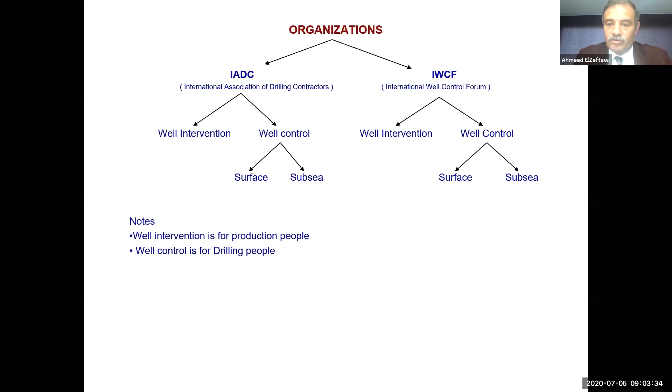So there are 2 organizations actually worldwide issue this certificate. One based in the United States of America, which is the International Association of Drilling Contractors. The other one is based in England, which is IWCF, stands for International Well Control Forum. But as I said, this is not a course of IWCF or IADC, as this will be through the university, and I believe you will get a certificate at the end of the course.

We split this course into 4 sessions. The first session will be today, which is today. It will be about well control. We'll have another session of completion. A 3rd session will be wireline. The 4th session will be coil tubing.

First of all, I need to share a secret with you. In all my years of experience, which is from 95, teaching in almost 18 to 20 countries around the globe, I always talk to people. This is the first time to talk to the wall. I used to talk to the wall when I fight with my wife, but that lasts for a few seconds. But talking for 1 hour to the wall, I mean to the computer, this is a unique experience for me. Hope I can manage.

This course, actually, the topics we will talk about is well control, risk assessment. We will talk quickly about what's pressure and what's volume. And we'll have a separate course, as I said, for completion, another one for coil tubing, and another one for wireline. Today we will discuss only well control.

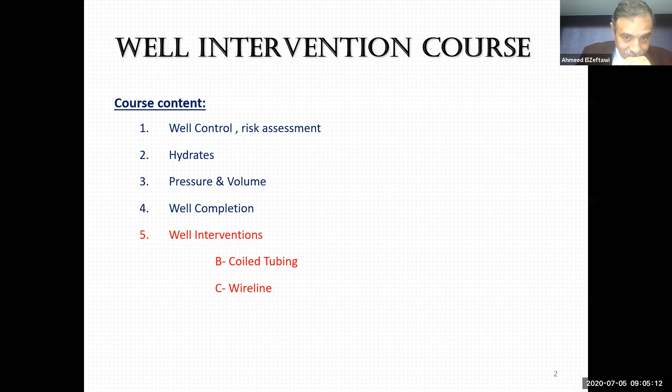Let's start from the beginning. To do any job, even not talking about oil field - if you have a problem in your car, to fix your car correctly, you have to go to a good mechanic. Then this mechanic has to have the right tools to fix your car, and he has to have a plan how to fix it. The same thing if you have some plumbing work at your villa: good plumber, good equipment, he has to have plans and procedures.

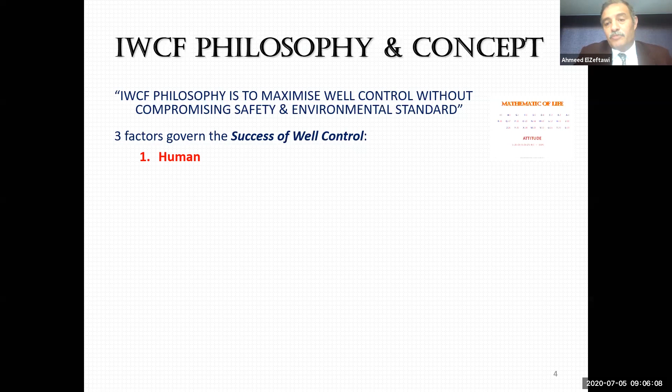The same thing applies to the oil field industry. And we said that 3 factors govern the success of any well control: human, equipment, plans and procedures. And from here, we have to fight.

I like fighting a lot, and this is one of the problems I'm facing now, that I cannot fight with you because I punch you, you cannot respond. Many people say, Ahmed, what you are writing is wrong. This could be right 50 years ago. But right now, equipment should come number 1. Human do mistakes. Human doesn't obey orders. But equipment, they don't do mistakes. Everything is computerized now. So you should write equipment number 1 and then put human number 2. And I said, well, who invented equipment? It's you and me.

Always human comes number 1. I gave an example: a good operator can run junk equipment, but not vice versa. If you have brand new equipment and a stupid operator, he will not be able to run it. And if he runs it, he will destroy it.

So human comes before equipment. That's why when we hire a gentleman or a lady to join the oil field industry, we have to check that he is the right person, going through a sequence of questions to be sure we select the right person.

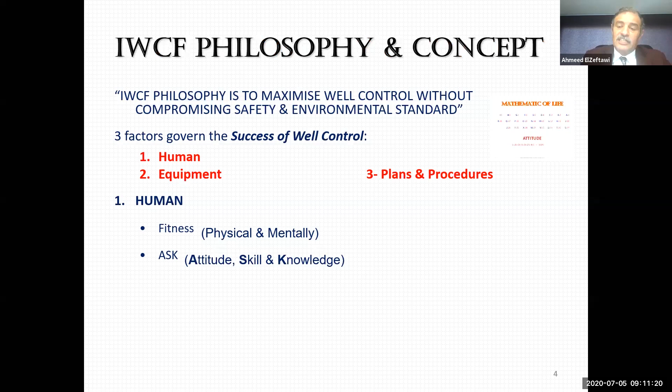One day I was working as an operation manager and I hired a supervisor. He was excellent in English. He is an engineer and he worked 12 years, he has 12 years experience. And he was working 1 month off, 1 month on.

After the 1 month, I asked him to come to my office, and I said, thank you, don't come back. What was the problem?

He used to go to the mess to have breakfast when they were in the field. If he found his helper sitting in his preferred chair, he would go to the helper and ask him to move, take his breakfast, and eat somewhere else, because this was the chair he liked to sit in. I fired him because of that.

This is a very bad attitude. He will destroy my team. So I said, thank you, don't come back. Attitude is very important.

Skills. We need people with the skills. Skills is very important as well. I always say people are 2 types: rock type and sponge type.

The sponge type people, if you put the sponge in a bucket of water, the sponge will absorb the water quickly. Go to the rock, put it in the bucket of water, come after a week, it is still a rock. It will change, yes, but this will take a year.

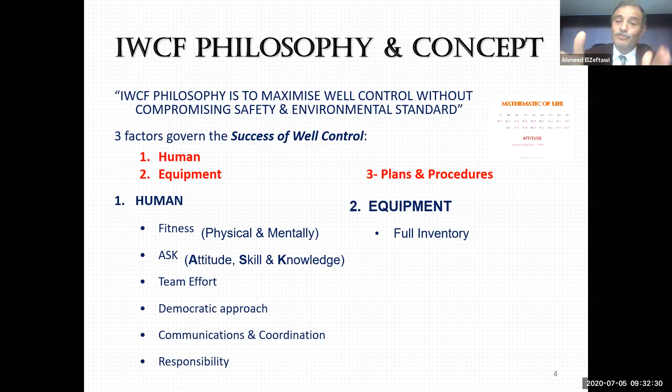We said human number one, equipment number two. People who work with the equipment should have a full inventory, here before it is in the book. We cannot say I am a company man doing a critical job and not know what equipment is available.

Then I go to the wireline supervisor and say we're going to run a gauge cutter in the field. If his answer is 'okay, let me check my toolbox if I have it or not,' you know what I should do? I should make a hole and bury him in the soil, because he should know exactly what he has. In well intervention, if I need this tool, I need it now. Now means now.

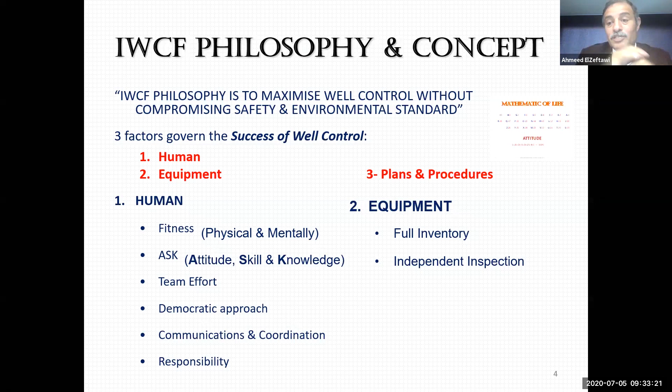Let me give you a life example. One day I was working in Abu Dhabi at the beginning of my career. It was a rigless operation, meaning there is no rig on location, so the service company comes to the desert and rigs up their equipment directly on the Christmas tree. The service company came, put the equipment on the ground, and before they rig up on the Christmas tree, the company representative has to come check the equipment before giving the signal to start the job.

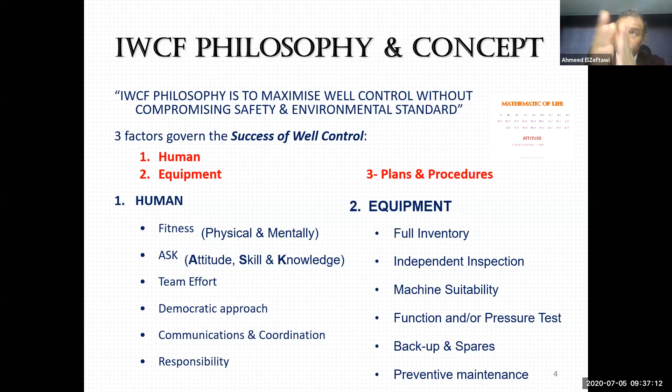We have to make pressure tests, have spares and backups, and have preventive maintenance. If I'm a company man and you're a service company bringing your equipment, before I allow you to enter my site I say 'bring me your file.' And if I look at the file and find that the last maintenance was done 6 months ago, you know what I'll do? Take your book, you see this door - go out and close the door. I don't want to see you again.

So, plans and procedures - we have to have plans for how to do the job and what the backup is if things go wrong. Say we decide to run coil tubing in the hole to 10,000 feet at 10,000 PSI, and then start mixing acid, run in the hole and pump acid. What if we run in the hole but get stuck at 5,000 feet? What about the acid we already mixed? How are we going to deal with it? So you have to have a backup plan.

Let's talk about barrier. Do you know what's barrier? People start telling me what's barrier, whatever in Arabic says that. I said, well, I can go to the dictionary and discover this. What does this mean? What's the meaning of the word?

Actually, if we ask ourselves what kind of well service disaster could happen caused by pressure, this is the word that we are all here for. If there is no pressure, we have no problem in the oil field. If any problem in the oil field, if you look at the root of the problem, you will find pressure somehow.

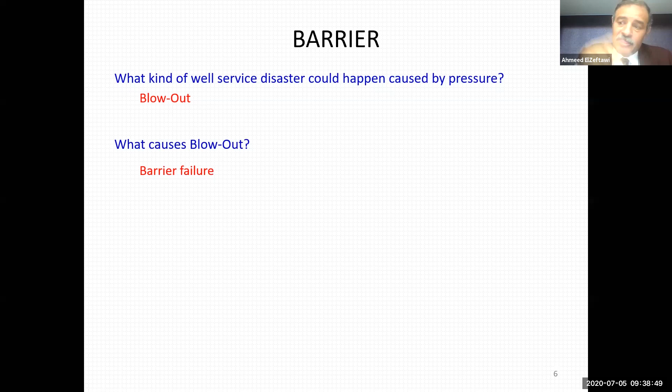Pressure will cause what we call blowout. What causes blowout? The barrier you select failed to do his job. What is the barrier? The definition of a barrier: it is any device, fluid or substance that prevents the flow of hydrocarbon.

Like Christmas tree - if the Christmas tree is closed, this will prevent. Like blowout preventer, BOPs, stuffing boxes, strip rubber and coil tubing and wireline. Wireline plug, the plugs that we are running in the hole to set it in the tubing to prevent. Some people say downhole safety valve. The downhole safety valve is a device that we run and set in the production tubing that when we close it, it will prevent. So according to this definition, any device or substance that prevents the well flow is a barrier.

But in well intervention, we don't consider it a barrier. We consider it an emergency barrier. What's the difference between a barrier and an emergency barrier? It's like this example I'm giving you.

This is my wallet. If I have 200 pounds in my wallet, which I put in my jacket now, and I have 300 pounds in my pocket - let us talk about dollars since you might not know what a pound is. So I have $200 in my wallet and $300 in my pocket. If you ask me how many dollars I have, I'd say 300. Come on Ahmeed, you have another 200 in your wallet. I said no, I don't see them. I live my life with the $300 in my pocket. This $200 in my wallet, I will show it to you when you put the knife on my neck - I will give you my wallet, my trouser, my shoes, everything.

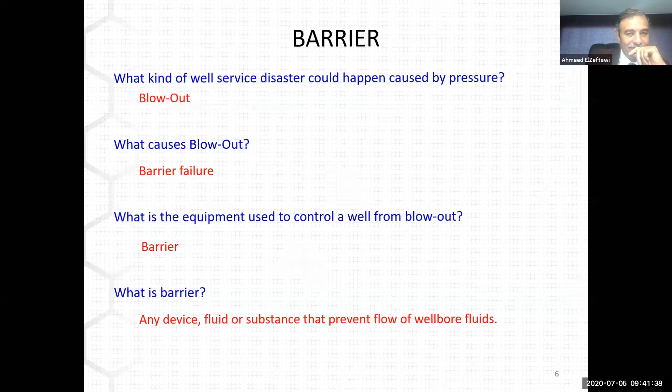We classify a barrier into 3 categories: primary barrier, secondary barrier, tertiary barrier. So normally, when we run in the hole using whatever device, wireline or coiled tubing, we always use our primary barrier, which is normally a rubber item that seals around the tubing or wireline. So we are running in the hole, and this rubber element that seals around this wire or pipe prevents well fluid or well pressure coming out. This is normally our primary barrier.

If during the job this primary barrier failed, what we have to do is first stop operation and use our secondary barrier. Why do we have to stop operation? Because the only barrier that can work while running in the hole or pulling out of the hole is the primary barrier. Any other barrier you are going to use is designed to work in a static condition. That's why you have to stop operation first and then apply the secondary barrier.

Normally the secondary barrier is also a rubber device, the BOP, blowout preventer, that when we close it, it seals around the wire or pipe. If you apply your secondary barrier and it fails to prevent the pressure coming out of the well - meaning your primary barrier failed and your secondary barrier failed - then you have to use your tertiary barrier. Normally your tertiary barrier is a shearing barrier, a barrier that shears - it cuts to be able to seal.

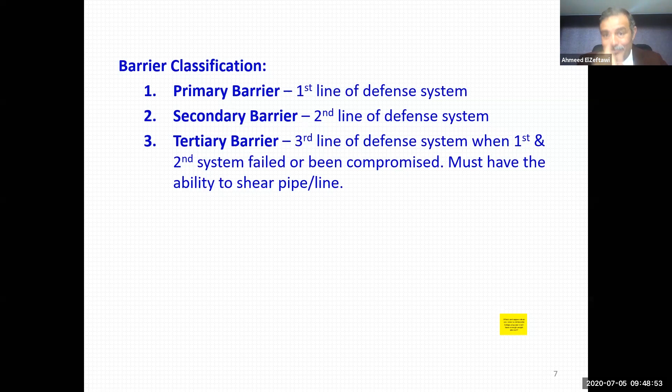This is a nice example of what can happen when you unset a retrievable bridge plug and don't have enough weight above it. The retrievable bridge plug is run with slick line or wire line through the production tubing, then passes into the open hole, to the casing. It has a rubber element that inflates to sit against the casing, not the tubing, to do a certain job. Once we finish the job, we run back to retrieve it.

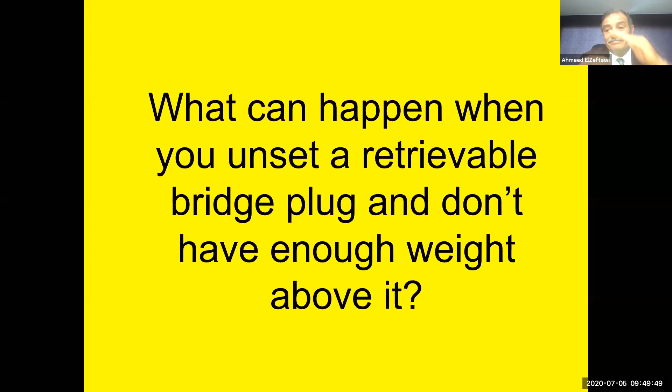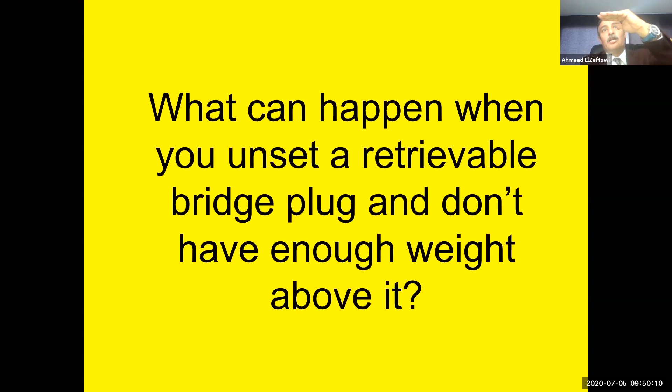Before you retrieve this bridge plug, what's the first thing you should do? You have to equalize the pressure. Because below the valve here is pressure, above it there is no pressure. This differential pressure, if you try to retrieve it, the moment you do, it comes out of its place. This pressure will push the valve to the sky. This is the picture you see. This is what we call a blowout.

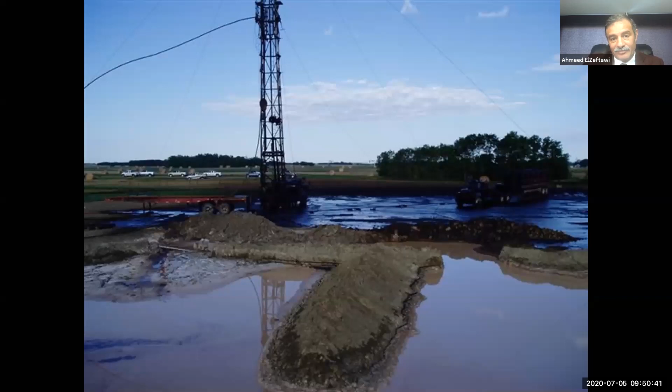You see this disaster? This is one of the questions you might have in the quiz: what is the impact of the blowout? If we put it in categories: number one, life loss, people will die. Number two, what you see, environmental loss. Number three, financial loss, you destroyed the field, the reservoir. Number four, reputation, your reputation will be affected definitely.

Number five, extra governmental regulation.

It's exactly like in the old days, when I travel I go to the airport maybe 2 hours before flight departure, then we pass by 1 or 2 checkpoints quickly. Nowadays it's completely different, they check me out. I have to go 4 hours before departure, and they start checking me out before I even enter the airport. I believe the next step, before you go out of your home, you'll find a checkpoint. Then you take your clothes off, they check you, then you go out, wear your clothes, walk 2 steps, would you please take your clothes off? Well, I just did here. Oh, would you please do it again? This bottle of water, I cannot take it with me to the airplane now.

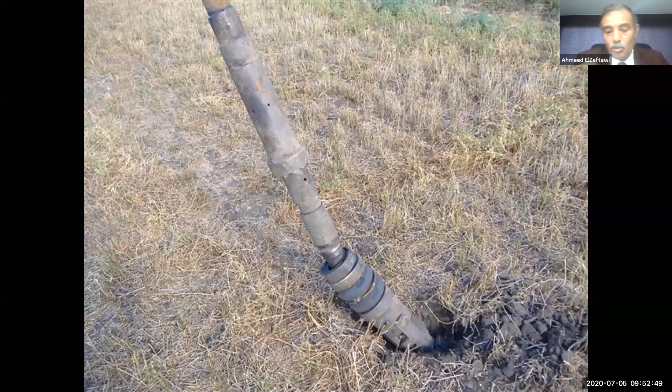This is the tubing that came out of the well, and this is the retrievable bridge plug. They found it here at the rig site. If you have a measuring tape to measure the distance between the rig site and where this bridge plug was found, it's 400 meters, almost half a kilometer. This was not there before, this was 1,000 feet below the ground. This is what pressure makes.

So you have to equalize. That's why to open a valve, you have to equalize the pressure. We have special types of valves that can open and close under pressure, but the majority of valves require you to equalize the pressure first.

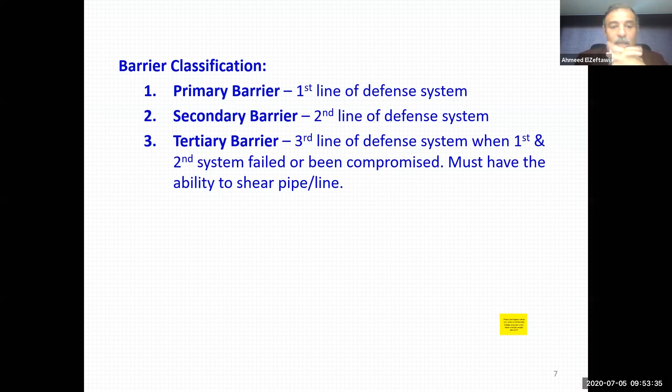What does the API say? The API recommendation is a minimum of 2 tested and available barriers, regardless of the type of operation. So at any particular job you are doing, the minimum number of barriers you have to have is 2. When we deal with well intervention, meaning coil tubing, wireline, or snubbing, because these 3 services are done under pressure, the minimum number of tested and available barriers is 2. That's why we always use 3, because during the job, if one fails, we're still covered by the API, we have 2 until we fix the 3rd, or we pull out of the hole to rearrange our barriers. So the minimum number, keep in mind, regardless of drilling, workover, or well intervention, is 2, regardless of pressure, even if the pressure is 0.

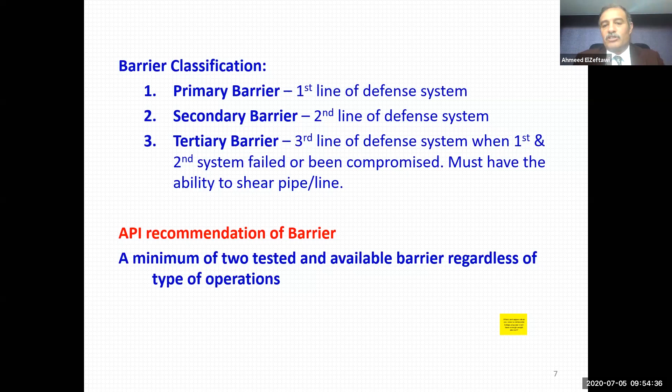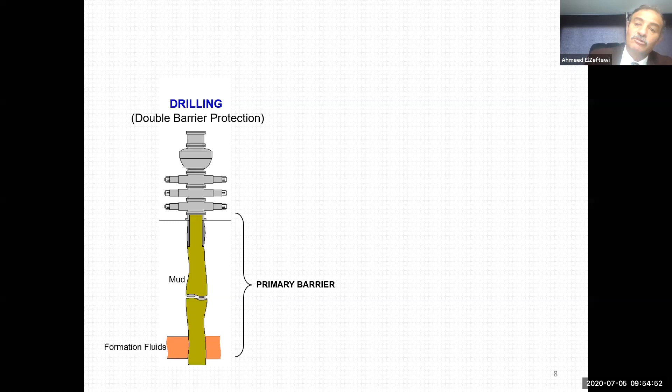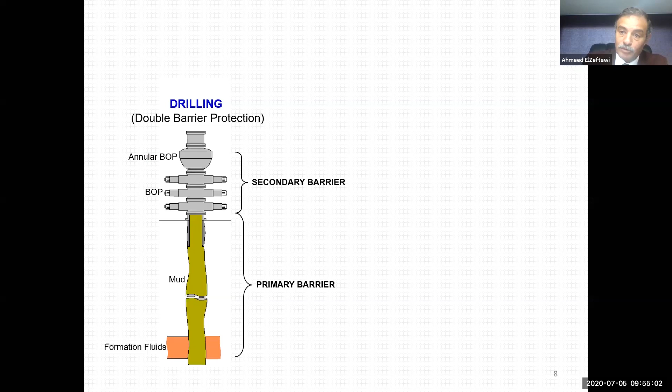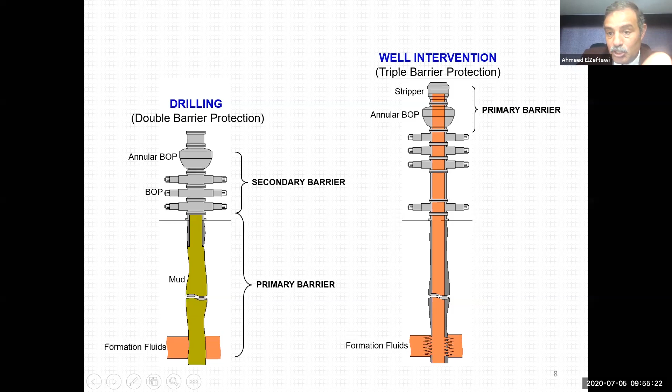In drilling, the 2 barriers we use are the BOP and the fluid, which is the mud. The mud is always our primary barrier because it's the first thing that faces the pressure downhole. If it fails, our secondary barrier works, which is the BOP, blowout preventer. In well intervention, it's the opposite, we count the barriers from top down. Our primary barrier is the rubber element, the stripper. Our secondary barrier is the BOP. Our tertiary barrier is the shear seal BOP. If the shear seal BOP fails, then our barrier is the Christmas tree.

There are two types of barriers we have: mechanical barrier and hydrostatic barrier. In mechanical barrier, we have two types: closed type and closable type.

What's the difference between the two? A closed type is closed throughout the operation. As we discussed, running in the hole, we have a rubber element, whether it's stripper or stuffing box or slick line or coiled tubing. During running in the hole, this rubber element is always closed on the metal while running in or pulling out of the hole. That's why this is closed type.

But the closable type is like the BOP. It's closed when required, meaning it's open by default. We close it when it is essential, like a blowout preventer. The blowout preventer, while running in or pulling out of the hole, is always in open position. When you close it, if your primary barrier failed, you stop the operation and close your secondary barrier, which is the BOP. That's why it is a closable barrier, not closed.

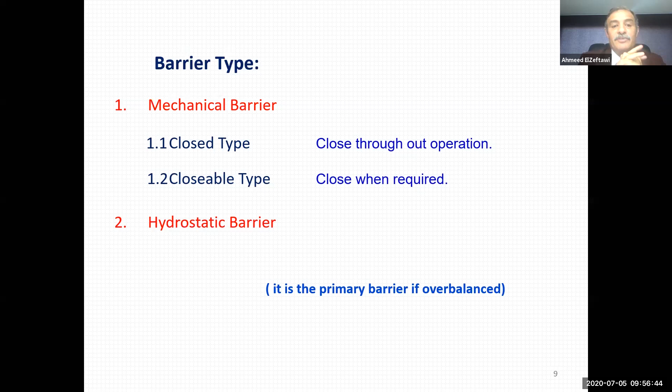The other type is the hydrostatic barrier, which is fluid. Actually, the word I just said is wrong. I should not say fluid, I should say liquid. Why? Because fluid is the whole category, under which comes gas and liquid.

Gas cannot be used as a barrier because it has no weight. So it has to be a liquid because the liquid creates weight. A hydrostatic barrier is a liquid that creates hydrostatic pressure, a column that creates hydrostatic pressure greater than the formation pressure.

If I put a full stop there, my statement is wrong. Because if the formation pressure is 3,000 psi, and I create a column of fluid that creates 6,000 psi on top of the formation, this is totally wrong because it will break the formation. The formation will not withstand this excess pressure. So it's a liquid that creates hydrostatic pressure greater than the formation pressure within 200 to 300 psi, within a certain margin. And it has to be monitored all the time. If the liquid is not monitored, the moment you lose monitoring, the liquid is not a barrier anymore.

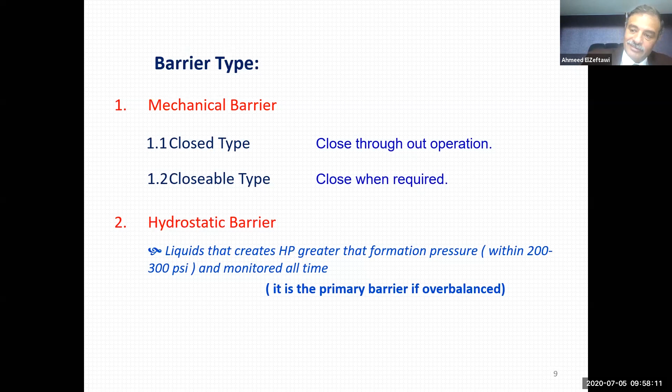The blowout preventer we put on top of the Christmas tree, we use it for this job. When we finish, we take it and put it on another job, another Christmas tree, then we travel to South Africa to do a job there, then we take it to our yard. Each place we put it, it is temporary.

That's why it's temporary. A permanent barrier is a barrier you cannot take out, like the casing. If we case the well, run the casing and then cement it, this is a permanent barrier before you perforate it, because you cannot take this casing out again.

An active barrier is the barrier that works now. So if you run a slick line, your primary barrier is the stuffing box, your secondary barrier is the BOP, and your tertiary barrier is the Christmas tree.

If you are running in the hole, this is a nice question. If you are running in the hole and your primary barrier is leaking, how many active barriers do you have now? The answers you have to select from are 0, 1, 2, or 3. Again, this is the slick line, you are running in the hole. It goes through your primary barrier, but this primary barrier is not holding the pressure, so pressure is coming out. At this snapshot, how many active barriers do you have? 0, 1, 2, or 3?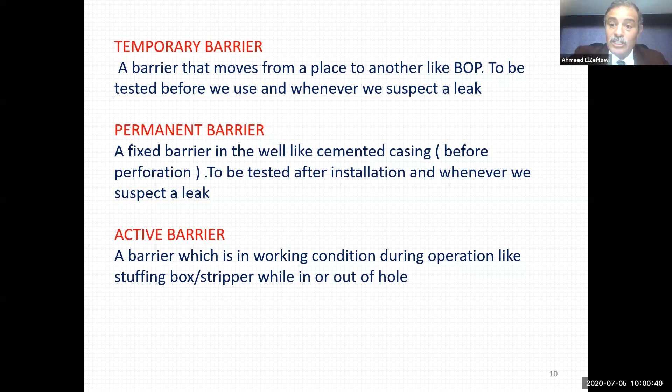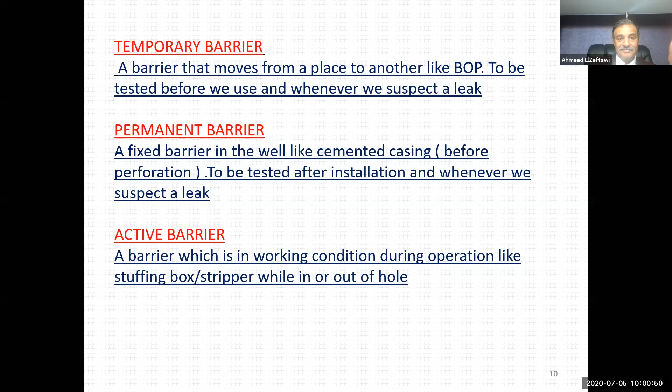This is what active barriers mean. Any barrier we use, you have to test it from its direction of flow. So if you are running a plug in the production tubing, how do you test it? Direction of flow. You cannot have a BOP and open a blind ram and test it from above. It was not designed for that. The BOP is designed to hold pressure from this direction, so you have to test it from this direction. Actually, if you test it from the wrong direction, you hurt the BOP. This will be recorded in its memory. You do this mistake once, twice, three times, then it will not hold pressure from here or even from there. So don't use it wrongly. You test the barrier from the direction of flow.

This table represents the 2 types of barriers we talk about: mechanical barrier and hydrostatic barrier. In mechanical barrier we have either closed type or closable type. A closed type like stuffing box, grease injection head, wire line, E-line, electric line, the stripper in the coil tubing, wire line plug. A closable type like BOP and Christmas tree, closable because they are normally open and you can close them when it is required.

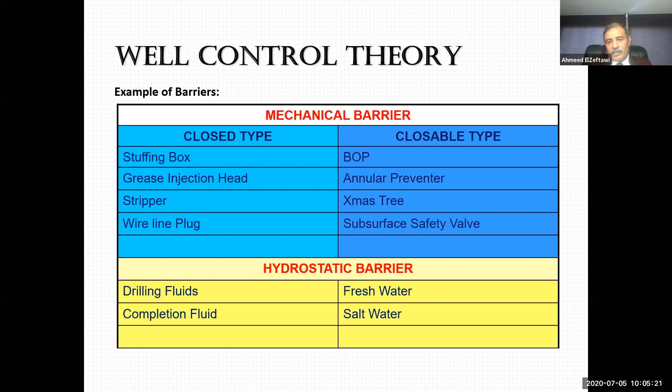The other box here - can I write nitrogen? Nitrogen is an inert gas, so safety-wise it is perfect. Yes, but we use nitrogen in the opposite operation actually. We use nitrogen in lifting operations to lift the well pressure to the surface, because nitrogen has no weight. So none of the gases we can use as a barrier.

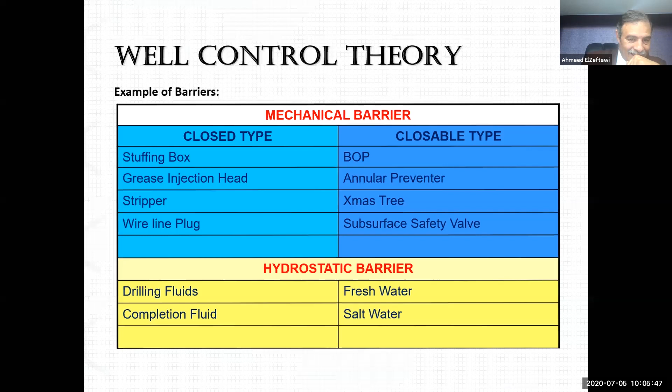What's overbalance? It's creating pressure greater than formation pressure. The opposite is underbalance, which is less pressure than formation pressure.

What's the inflow test? Remember, when we run a plug in the production tubing to isolate the well, now we need to set this plug. In which direction should we test it? We test the direction of flow. But now, if we put this plug at the end of the production tubing, how do you test it from direction of flow? You cannot.

The only way to test it is to do what we call an inflow test, where you bleed off the pressure above this plug, then close and watch the pressure gauge at the top. If the pressure gauge rises, that means this plug is leaking. This is what an inflow test is - bleeding off the pressure above the plug and monitoring for buildup. Some people say, okay Ahmed, we will bleed off the pressure above the plug - should we bleed it to zero?

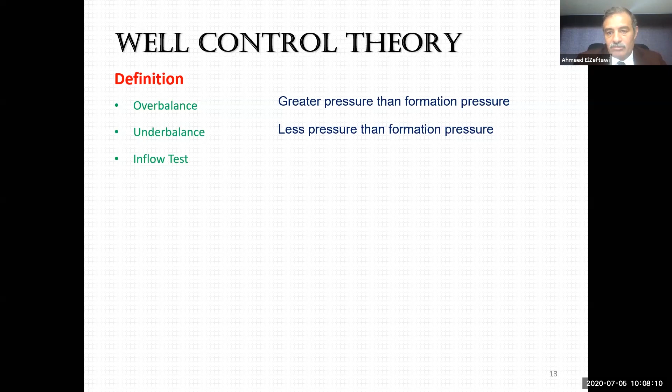So an inflow test: bleed off the pressure from above and monitor the buildup. And then we have a question. What if, Ahmed, we put a plug and we cannot perform an inflow test? Should we test the plug from above? You guys, because you just listened to me a while ago, I said we have to test the barrier from the direction of flow. This is the direction of flow. So testing it from above is against what I said. So you tell me, no.

I said, your answer is wrong. Look at the words of the question. If we set a plug and we cannot perform an inflow test, should the barrier be tested from above? Yes, it should. How come?

Let's understand first: if you put a plug, why can't you perform an inflow test? The only answer I can find is that the wellhead is dead. The well is dead, so pressure here is zero. So bleeding off the pressure above, closing and sitting on this, you could sit for 3 years and nothing will happen because the pressure below is zero. So you will not notice any rise in the wellhead pressure.

So in this particular case, we put what we call a positive plug. A normal plug will withstand pressure from this direction only. But a positive plug is a special plug that holds pressure from both directions, from below and from above. So if you cannot perform an inflow test, please test the plug from above.

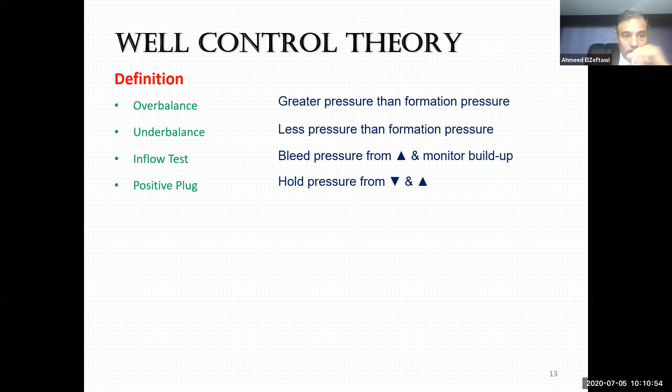We talked about the barrier, but this is a new expression: formation fracture pressure. What's the formation fracture pressure? Each formation has its own fracture pressure - like we said, this formation's fracture pressure is 3,000 psi, meaning it will withstand pressure above it up to 3,000 psi. If you exceed that, it will break.

Break what? What's the formation? It's grains, right? These grains are apart from each other, and there are unseen links between these grains. There is a gap between each grain and the other. That's why the oil will go through these gaps between the grains all the way to the surface.

If you exceed the formation fracture pressure, you break it - meaning you break these unseen links. So these grains get apart from each other, vertically or horizontally. But the moment you stop this pressure, stop pumping, the grains, when they come back, will not return to their original place - it's going to collapse. When it collapses, there are no gaps between these grains, so fluid cannot go through it.

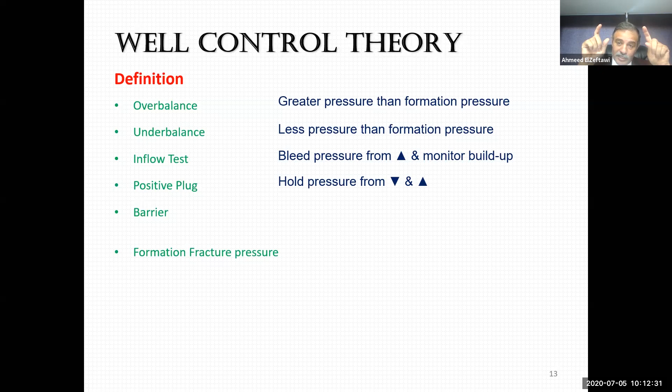You damage the formation. That's why the formation fracture pressure, as an expression, is the maximum pressure applied to the formation before it breaks down, or we can say when it breaks down. Both are correct - before and when, we are talking about a difference of 1/10 of a psi.

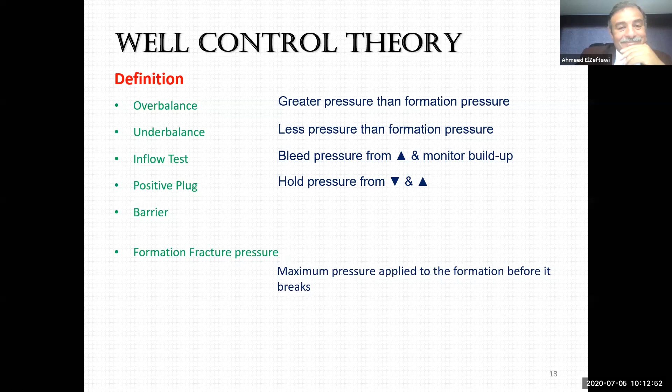Formation damage. What damages formation? So many reasons can damage a formation - we can talk about 10 or 15. But let's talk about the majority. I will say two things are the norm: pressure and fluid.

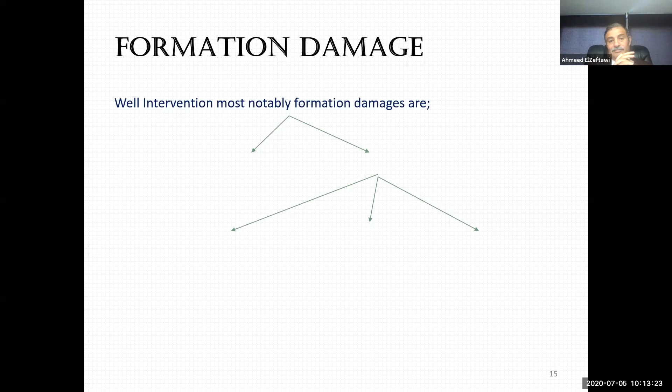Exceeding the formation fracture pressure. If the formation fracture pressure is 3,000 psi and you pump using 4,000 or 5,000 psi, you are damaging the formation.

Don't understand me wrong, because we have jobs we call frac jobs. Frac job means fracture job - the formation pressure is 3,000 and we pump 10,000 psi intentionally. We know what we are doing. Yes, we are breaking the formation and creating gaps between grains, but before we stop, we fill these gaps with artificial grains that have high permeability. So if we stop pumping, these original grains cannot go back because we already filled this space. But this is another topic, not to talk about now. Normally, if you exceed the formation fracture pressure, you damage the formation.

The other, number two, is the fluid. Fluid creates pressure, which we already talked about in number one. The other two elements in fluid are compatibility and cleanliness. Compatibility means the fluid we are using to treat this formation has to be compatible with the formation - friendly to the formation.

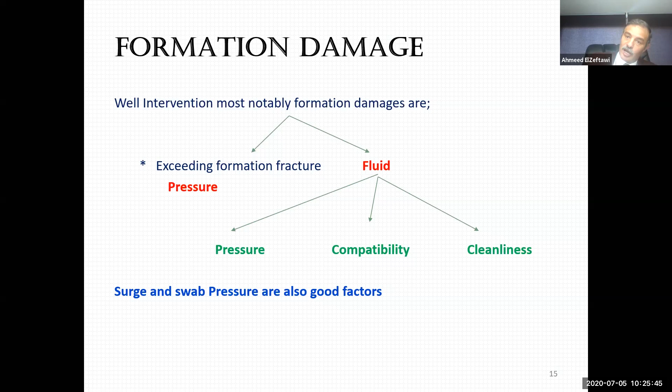I didn't see this line in API. I didn't see a line between low and high - there are no words in API for low and high. The only time, as far as I've read in API, that they mention low and high in this field is when we talk about pressure testing. In the old days, when we pressure tested our equipment to 5,000 psi, raising the pressure from 0 up to 5,000, passing by 300, 400, 500, we would see our connections start to leak. Then the company said, Ahmed, you have a leak. I said...